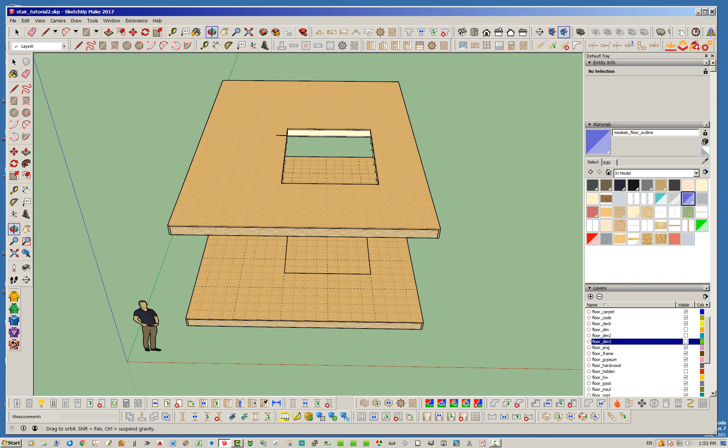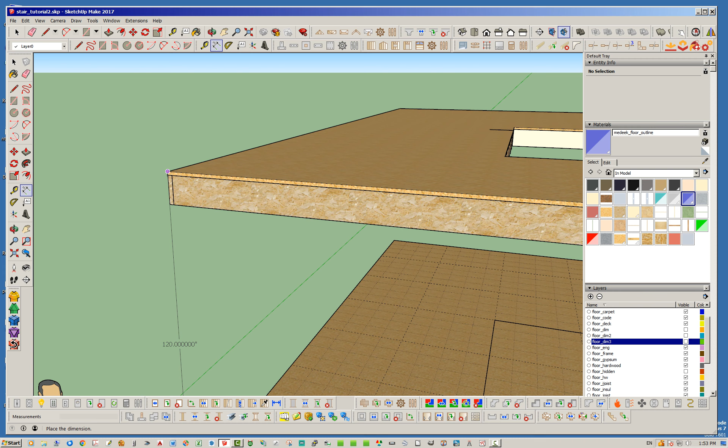Today I wanted to discuss stairs a little more. I've had a few questions recently about how to deal with stairs, especially with multiple landings. So what I've gone ahead and done is created these two floors. Actually, I've just created one floor and then moved the other one 120 inches or 10 feet up above the other one. So let's show you that real quick. Want to demonstrate a couple things here. So I've also turned my units so you've got the decimal just so we can see exactly what we've got here.

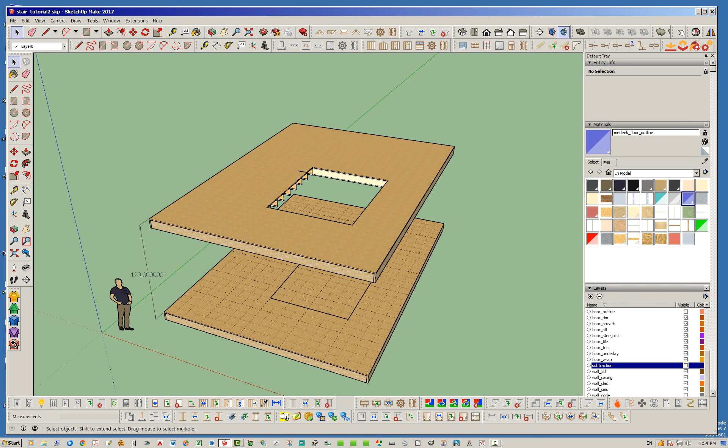Okay, so basically they're 10 feet apart, these two floors, and then I used a solid, and I'm just trying to do things quickly here. I just cut a hole in this floor, made this opening, and basically what I want to demonstrate for you guys is kind of my way of handling multiple landings. For example, this is going to be a kind of U-shaped stairs with two landings on it. So I've just got this opening. I didn't plan it out too much other than I want to do a 36-inch wide stairs with a couple landings. So let's go ahead.

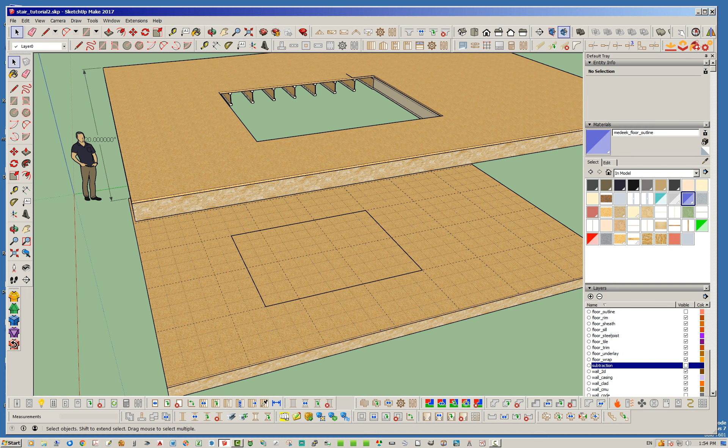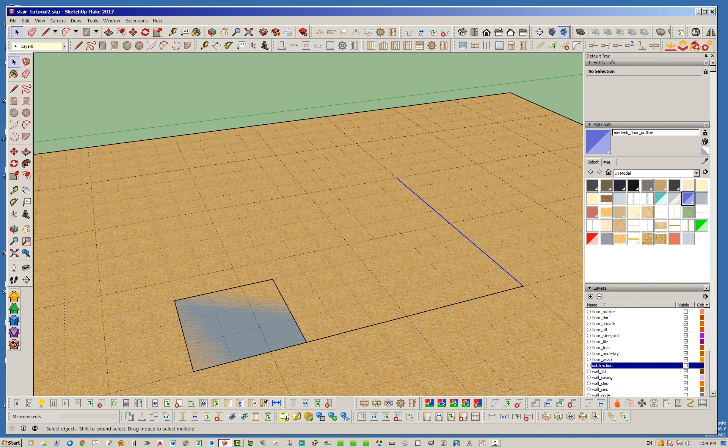What I like to do is put my footprint down below on another floor just to kind of lay things out. Use my grid tool here so I can quickly map things out. I'm not going to worry too much about framing or anything complicated. I'm just going to put a landing right here. And it looks like I have this other line, let's just remove it. We don't need that line anyways. And I'm going to remove that one as well. So I just want to create a couple solids here to help demonstrate what's going on.

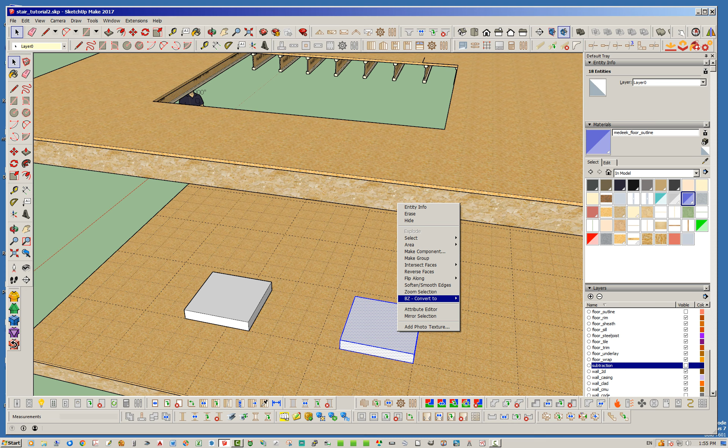So this is my first landing, and make that a group. And then over here in this other corner, we've got this other landing. Now you'll notice I'm not putting these landings vertically where I think they're going to be, because I'm going to use the stairs themselves to help me figure that out. So first, I'm just going to put the footprint down on the bottom floor here. So there's my two 36-inch landings, positioned kind of where they're going to be.

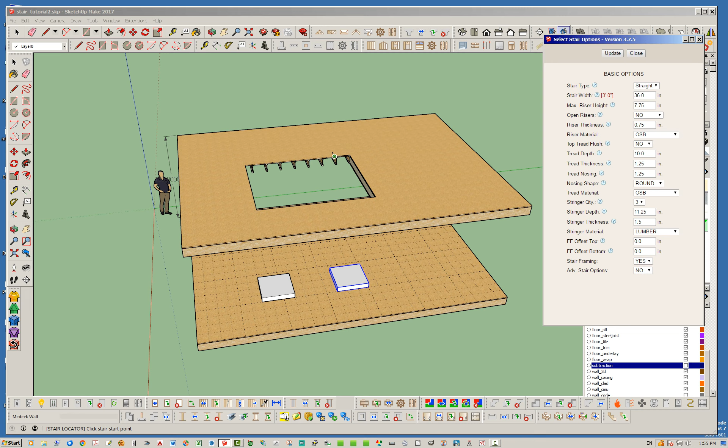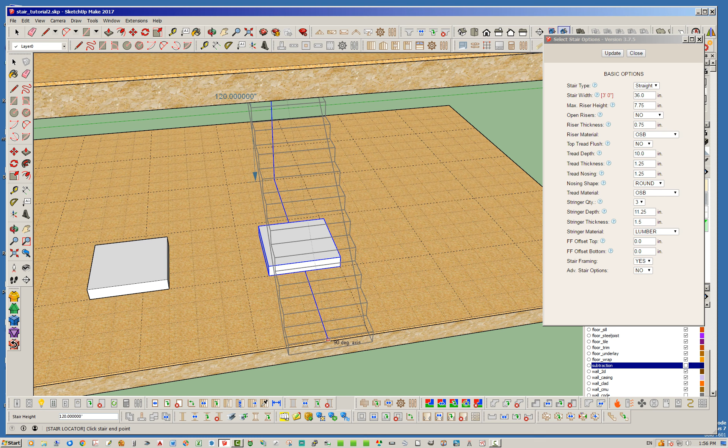So I'm going to go ahead and draw in the stairs from my start point here. You could do it anywhere. It doesn't have to be at your start point, but I think this makes it a little easier. I'm just going to start there, come down to this next floor, and make sure things line up. Notice how you can make it rotate whichever way you like. I think if you hit the control key, we can get it to stay orthogonal, which is what I want. And notice the distance is 120 inches, which is what I want.

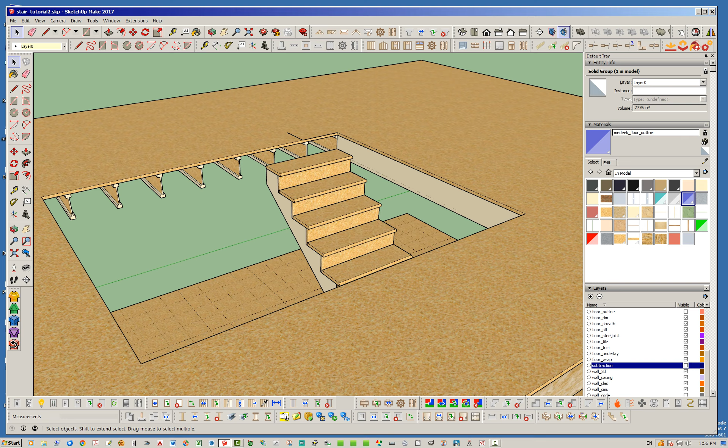Okay, so that is what you'd end up with if you had a full single run of stairs. And what's important here is I want to keep all of my stair risers across these different flights of stairs the same height if possible. I know you can vary within what the code says, like 1/16 of an inch or something like that. But for layout purposes, I want to keep everything the same. Just out of curiosity, I'm going to measure this calculated height here, and yeah, that's 7.5. It works out perfectly because we actually have 120 inches. But in a lot of cases, it won't be exact. It'll be some other decimal value.

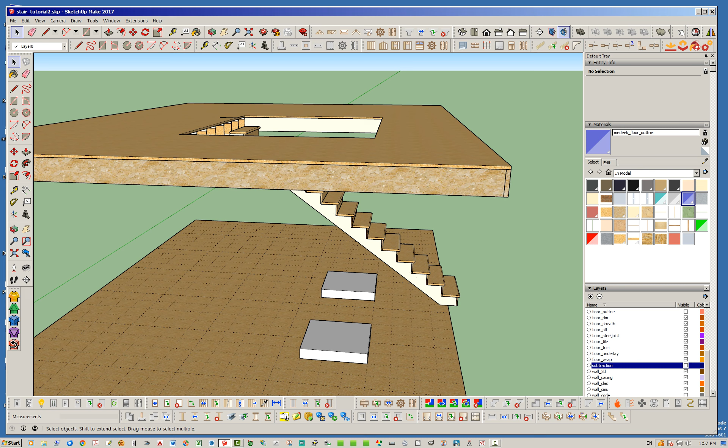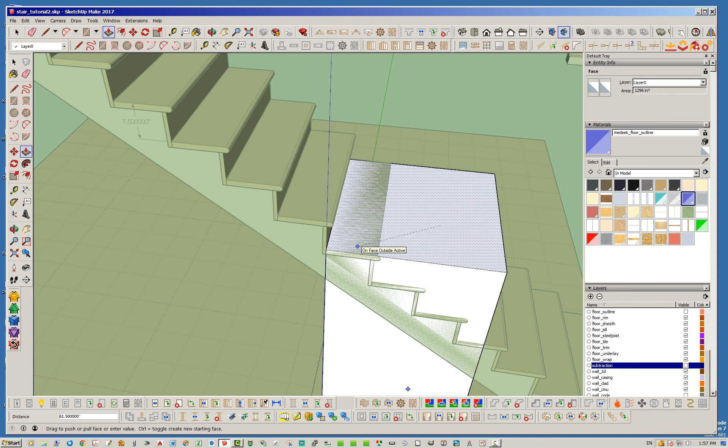Okay, so what's important here is I want to use this main run of stairs to figure out where the height of that landing needs to be. So I'll click in here, and I'm going to use the push-pull tool and push and pull this around. Okay, so obviously that's not going to work. I mean, it could work, but then my next stair coming down will be out over there somewhere. So that looks pretty close, right? So I'm going to put that at the same height as that stair right there.

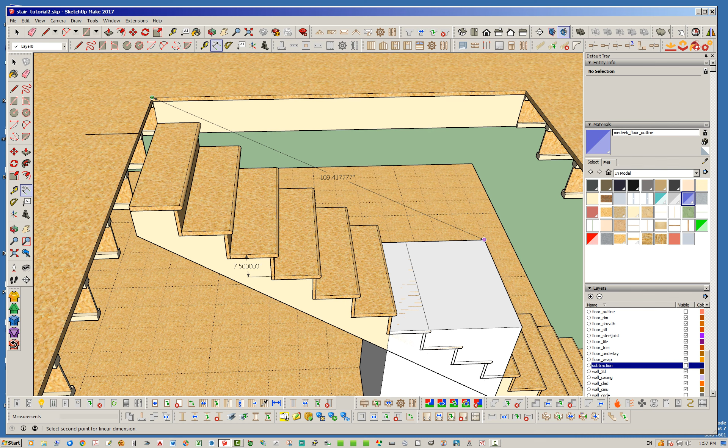Okay, and then I'm just going to measure this. I could redraw these stairs, or I could just modify this to the correct height. So let's show both. So first I'm going to measure from here to this landing. Okay, so that is 52.5 inches from top of subfloor here to top of subfloor here.

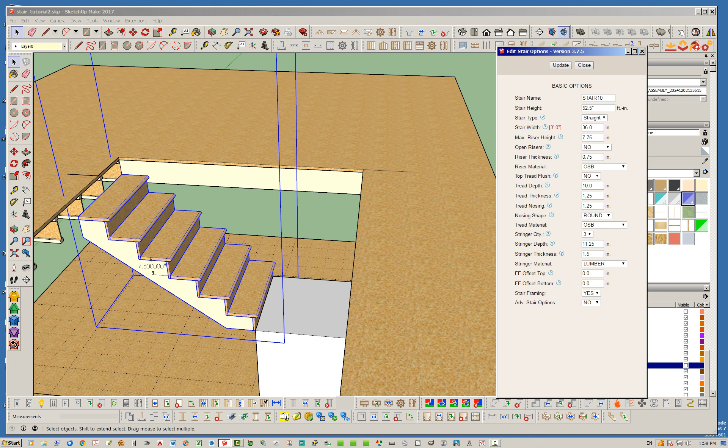All right, so what we could do is edit this stair assembly. You'll notice here we have a stair height, so I could just go ahead and put in 52.5 inches and hit update, and you'll notice that it is perfectly lined up. So now by doing that, we know that this landing is going to be perfectly vertically 7.5 inches off that next stair tread. Let's double check that just to make sure. And yes, 7.5.

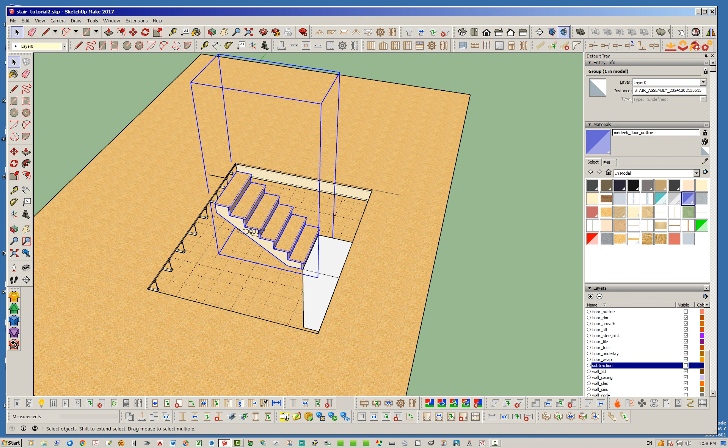Okay, so that's one way of doing it. Another way to do it, I'm just going to go ahead and delete that now, and click stair again and just start here. You always start at your top, right in the center there. You can actually adjust this as well, but I'm just going to come here, and boom, same thing, same result, 52.5.

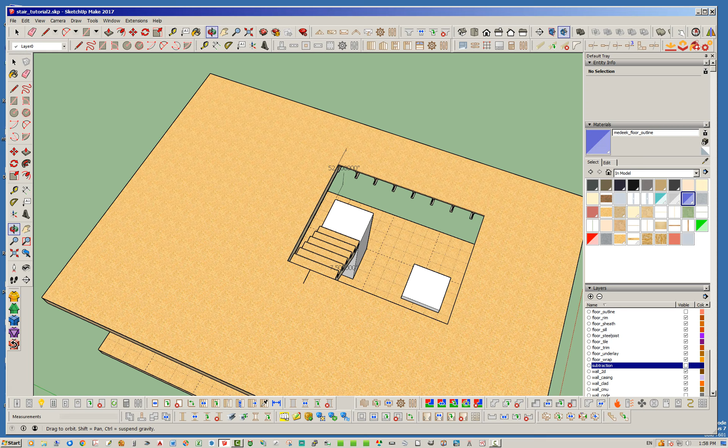All right, so now we've got the same situation coming down here to this next landing. We don't know where that next landing is going to be, but what we can do is the same thing again. We'll just draw another stairs coming off this landing, and we'll just drop it right here. And we want to get it orthogonal. Let's hit the control key one more time.

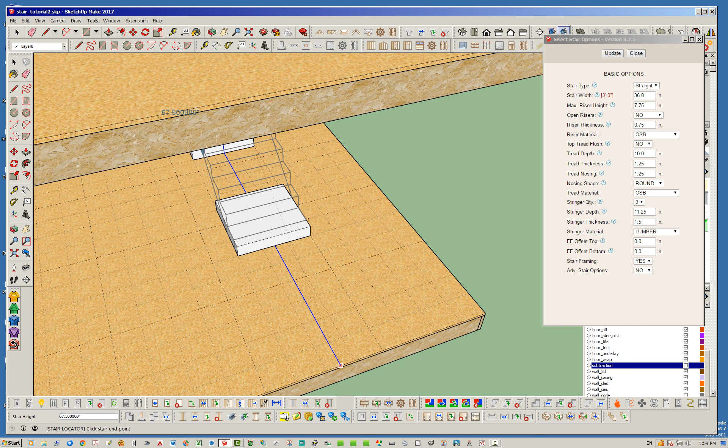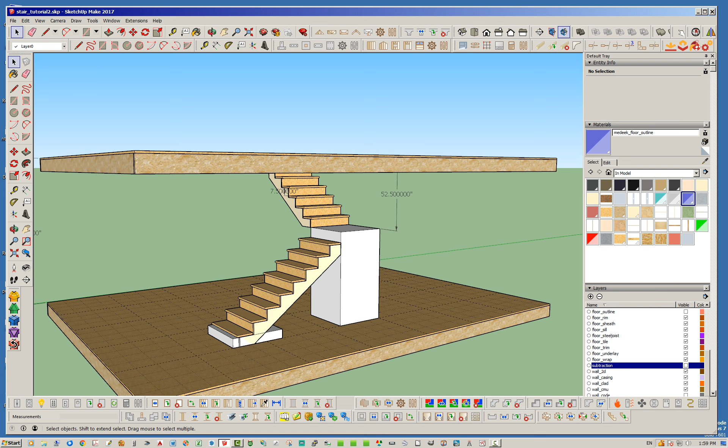Okay, so we can see that where this landing is, of course, now we need to move our landing up, figure out where that's going to be. Actually, before we do that, let's take a look at this. So as you can see, we obviously don't have enough room. We have to have that landing come up to meet those stairs, but that's easily enough accomplished. We're just going to go ahead and use our push-pull tool yet again.

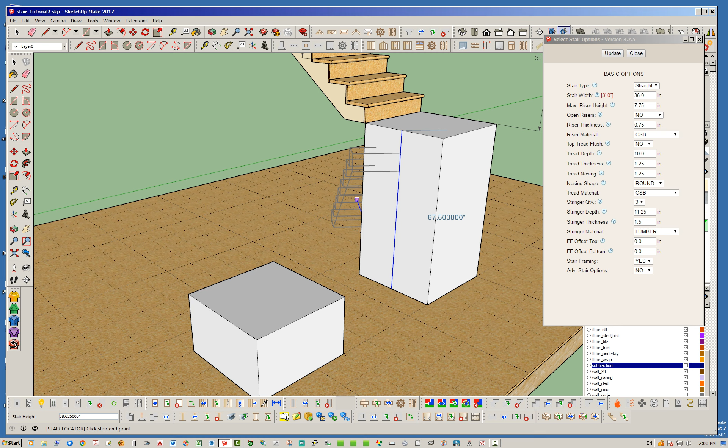And we can see that this doesn't quite work. This is probably our closest. So let's go ahead and do that. And then again, let's just go ahead and make our life easy and recreate that stairs. Just go to the center of that, center this, and boom, there we go.

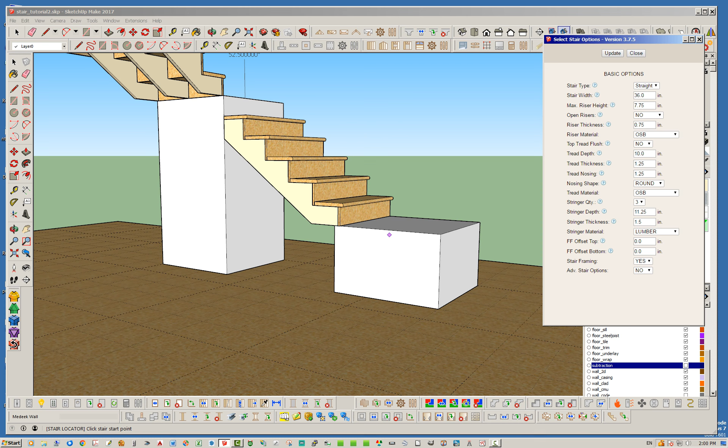All right, and then it's a little hard here, we keep running into this floor. I hate it when that does that. Okay, and then last but not least, let's get this little stairs coming off of here. So we just do the same thing again. Go to the center of that, and then hit our control key. Nope, there we go. And there we go. All right.

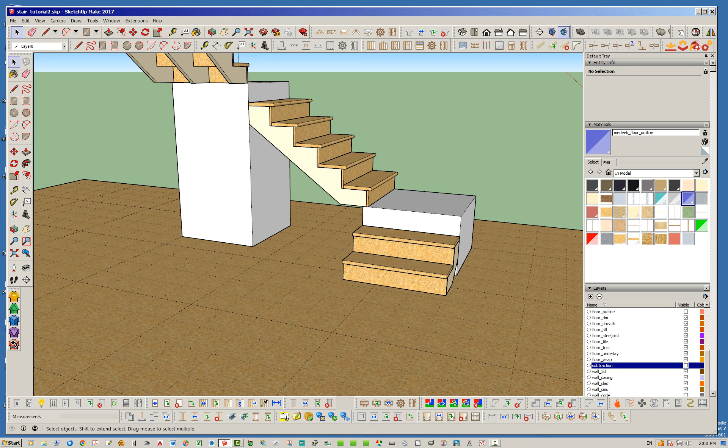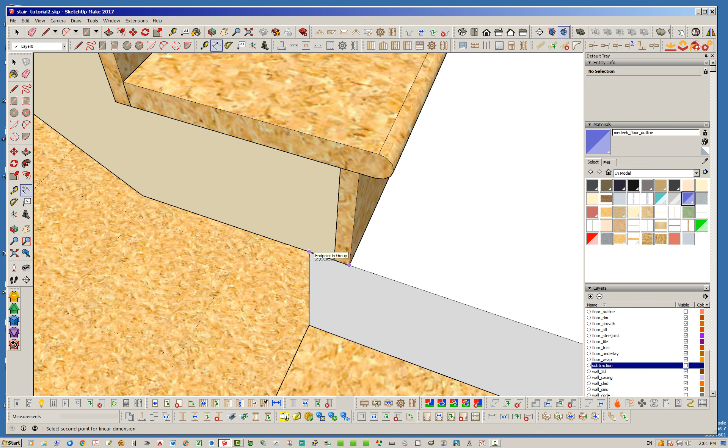So yeah, we're a little shy right there of 36 inches. So a couple of things we can do. We can either adjust our opening a little bit if we need to, so that we have a few more inches. If that's not an option, I suppose one could always adjust your tread depth and push that back just a little bit if that doesn't quite give us enough space there for that full 36-inch landing. Yeah, see, we're 2 inches short of 36 inches there. And then of course here it just happens to work out.

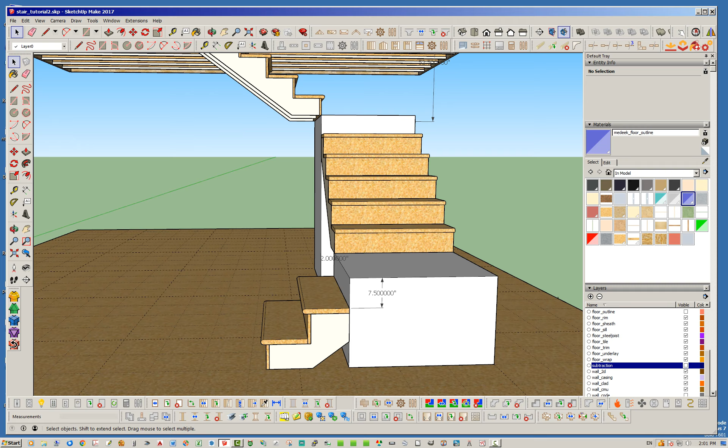But anyways, the key thing I want to show you is that by using the full run of stairs like that, and then using that to adjust your landings to it, you make sure that you are exactly getting these stair heights, all these rises, the exact same. See, they're all 7.5 inches, and it's taken that and dividing it and figured it out. It's doing all the calculations really for you. So that's I think kind of the beauty of this little stair module part of the wall plugin, the fact that you don't have to do a lot of math if you're strategic about it.

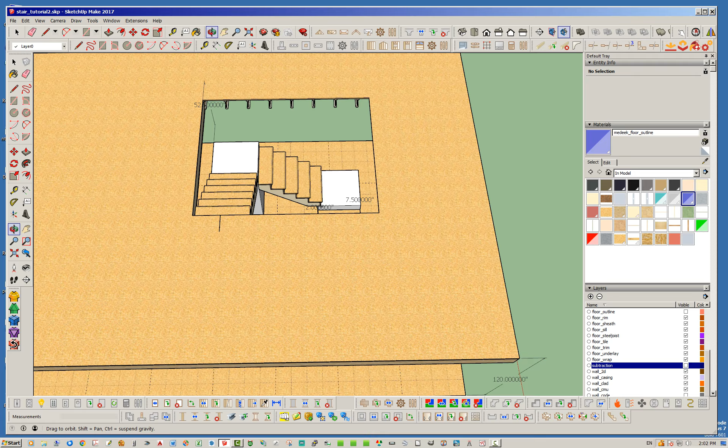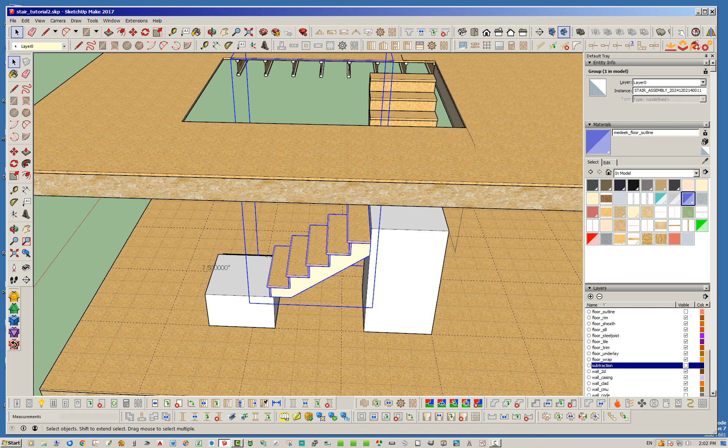All right, so there we go. There's a couple landings, 36 inches, and some stairs coming off of them. And the nice thing too is you get in here and edit this, and if you want to change your stringers to like 4 stringers instead of 3, you don't have to redo anything, it just takes care of it for you. So there's a lot more details, of course, with this module. There's a lot of advanced options, but I just kind of wanted to demonstrate the 2 landing concept here, and you could apply this to any number of landings.

At some point, I think I would like to add in a module or an advanced option where it will calculate all this for you and put in your landings and everything. But I guess what I'm getting at is it can get rather complicated, and as you can see, there's a lot of parameters involved, how these landings are spaced, etc. So yeah, I'll have to give that a lot more thought as to how that's going to happen if I do that.